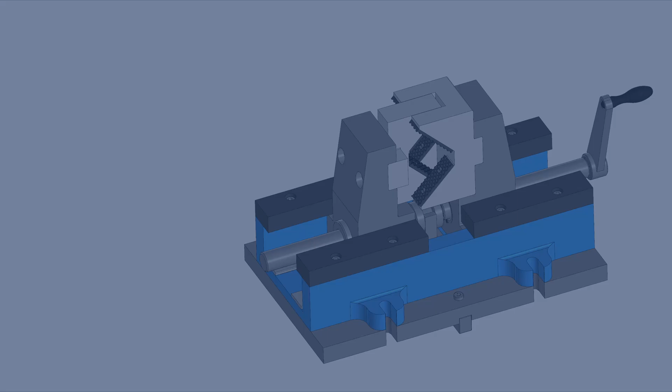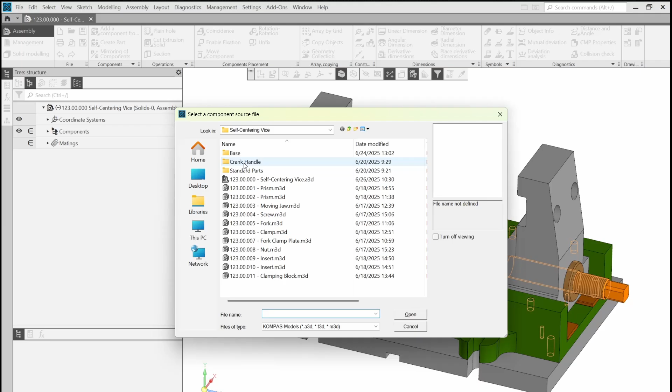In this lesson, we'll add the crank handle subassembly, which was prepared in advance, and 2 prisms. Let's add one more subassembly, the crank handle. We won't assemble it in this course, but if you go to the Quick Start courses, you'll find the course on the crank handle there. If you don't want to assemble the crank handle, you can find the pre-made model in the same folder where all the vise parts are located. Let's add it to our assembly.

Click By matings and Coaxial. Select the cylindrical face of the handle, then the screw's cylindrical face. Check the handle position - it's OK in my case. Let's move the handle closer to its proper position to get a better look at it. Note that you can already rotate it thanks to the coaxial mating.

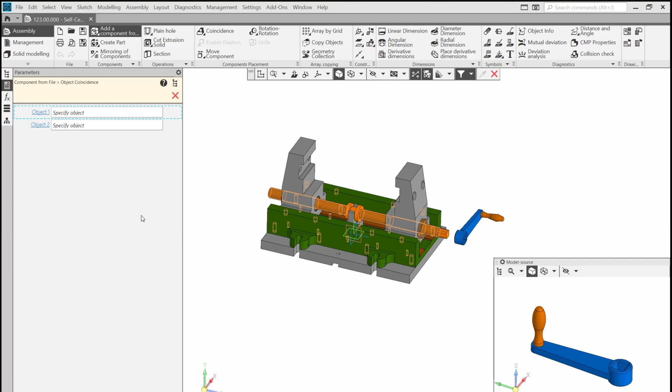Stop the Move Component command. Confirm. Start the coincidence mating. Select the plane face of the handle hole and the screw. Reverse the orientation if needed. Add one more coincidence mating between the face of the handle nut and this plane face of the screw.

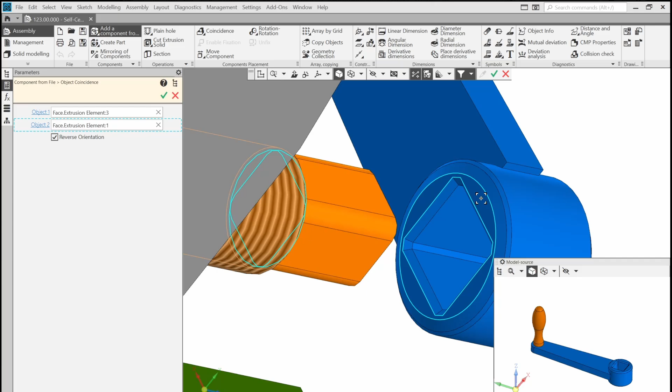Confirm. Confirm and stop the command. Let's test the assembly. Start the Move Component command and try moving the handle. You'll see that the handle rotates and the screw rotates simultaneously. Let me zoom in to see this better.

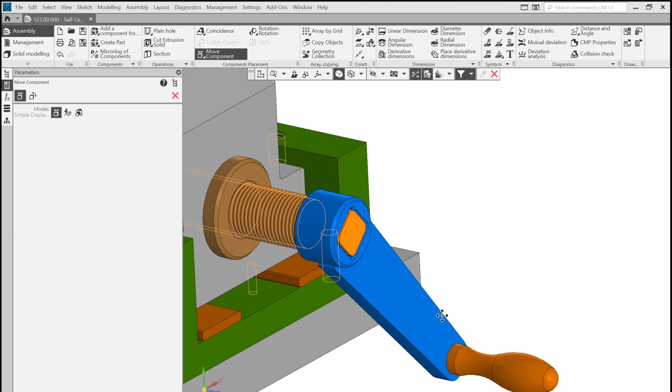Next, we'll add the first prism. There are 2 prisms. Select the one that has 1 at the end of its designation. Click Open. By matings. Select the plane face of the prism and the left jaw. Click Coincidence.

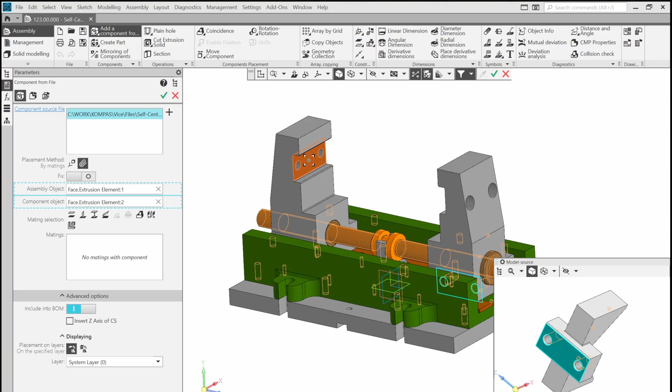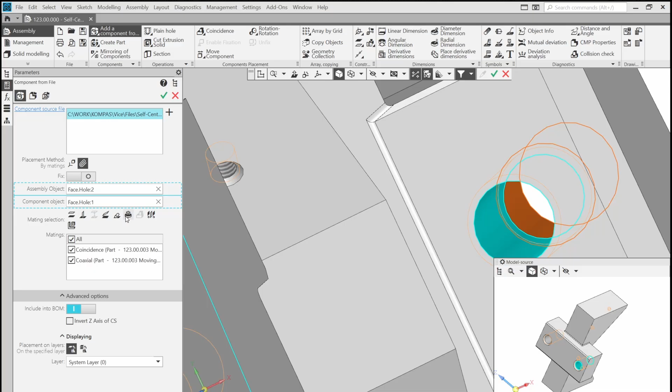Create the coaxial mating for the first hole. And for the second hole. Here no errors have appeared, so we can conclude that parts were designed correctly. Confirm.

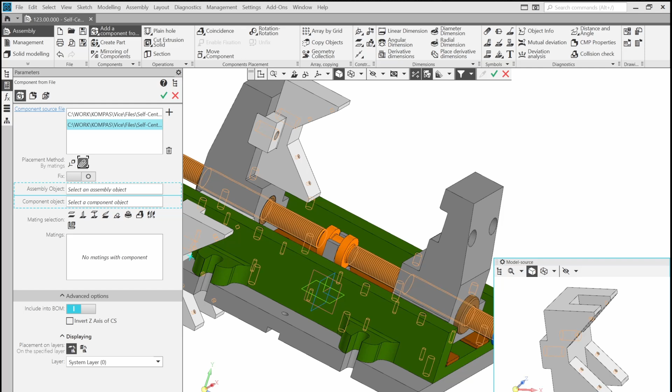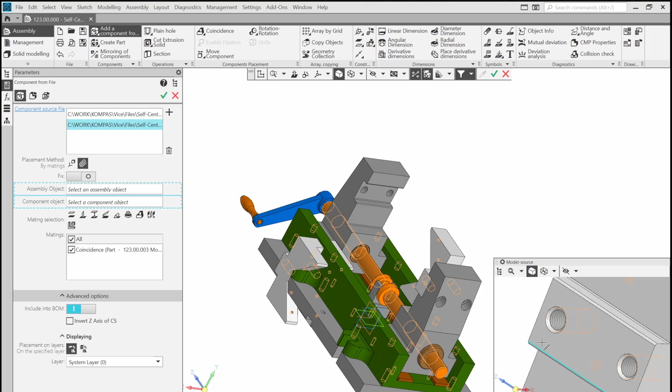Here I need to reverse the orientation. Make the holes of the prism concentric with the holes of the jaw. I've made a mistake. Let me delete the mating and create it again. I'll move the prism.

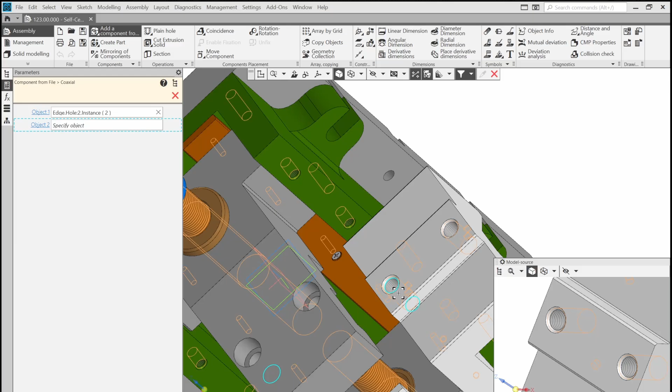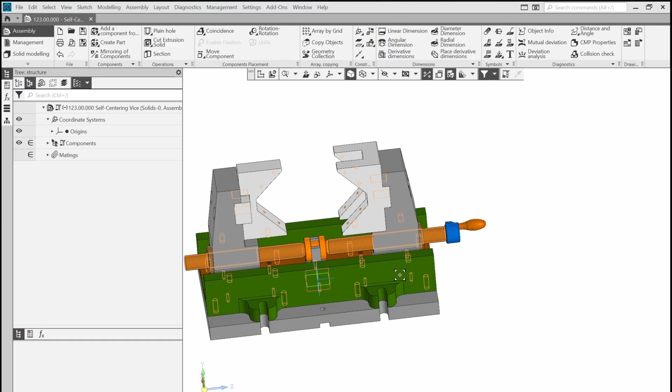Confirm. And for the second hole. Confirm and stop the command. Let's try moving the jaw. As you can see, the parts that are connected to the jaw move accordingly.